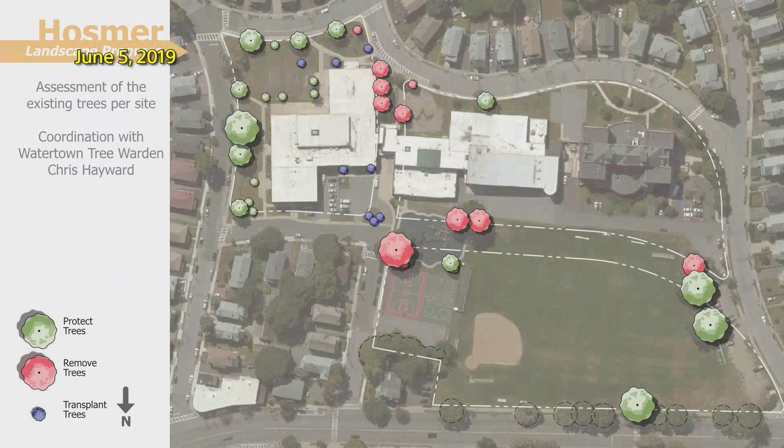And the next slide, I think, is essentially the same thing, but it just gives you a better idea of the building location and why some of the trees would have to be removed as part of the project.

These are all drawn to scale showing the true drip lines of the trees using Google mapping that's accurately geolocated to the sites. So this shows the proposed building, and again the trees to be removed in red, and it's obvious why they're either falling in the proposed building location or roadway location. In some instances there would be significant grading around the trees. But the trees we would look to protect would have tree protection fencing, chain link, very stringent specifications as far as protection, and it would be at the drip line of the trees.

We're going to chain link?

We'll review them by school, so if there are any questions associated specifically with the Hosmer, we're happy to address those before we go on to the other schools.

Okay, questions on the trees from Steve? You said chain link fence protection?

A 6-foot chain link construction fence around the drip line of trees to be protected, usually in a large group of trees, so we can capture a whole area. In this instance, along Chauncey, there's a large swath of trees right in a row. We would want to have the chain link fence running along the drip line along the entire area, so all of the lawn area would be protected.

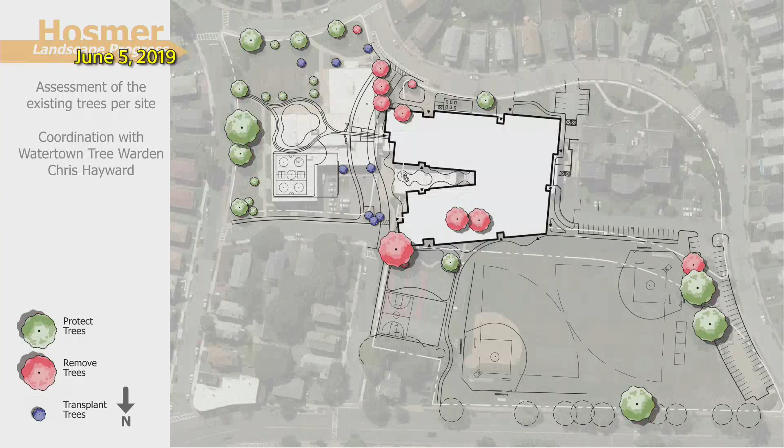Just a quick comment—those trees to the far right, the one shown in red, is in tough shape. I understand the other two trees are probably healthy, but in terms of functionality it's not going to work with the field there, so I don't know how you're going to handle it, trim them back or so on. The tree warden is well aware, and he's done some tree trimming the last time we were out there. That last tree shown in red, he does agree it's in rough shape.

Okay, thank you. Okay, Scott.

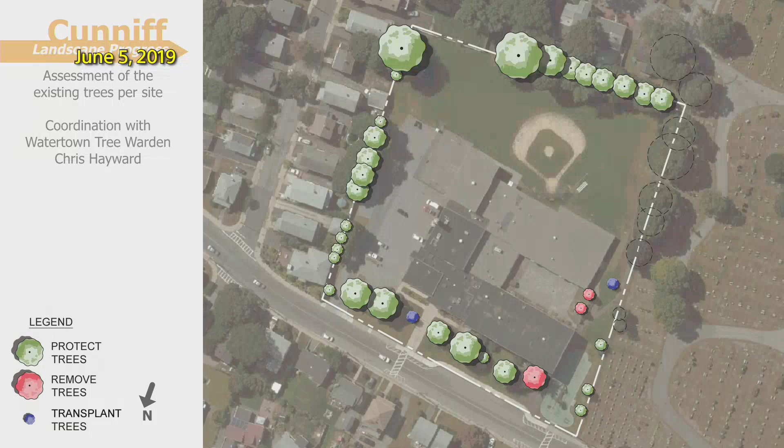This is Cunniff, and it's a little easier of a site. Most of the trees are around the perimeter. Along the front, along Warren Street, we're investigating how we're transitioning the new entrance from Warren up to the new front entrance of the school, and trying to preserve those trees along the front as much as possible, with the exception of the one shown in red, a pine tree very close to the construction of the new building, and a few transplants we're working through with the tree warden.

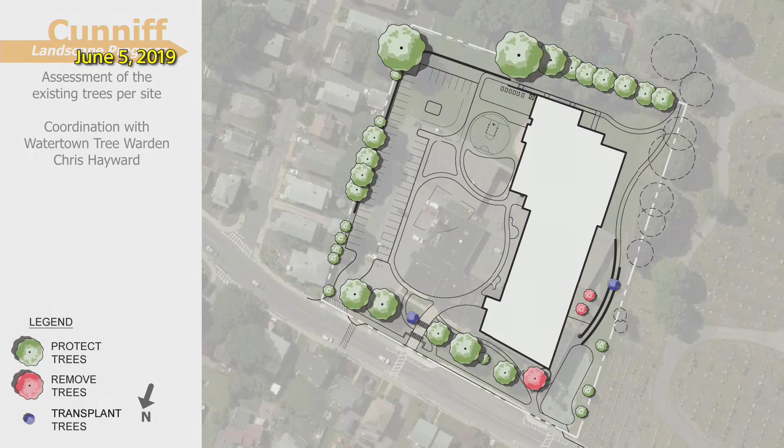Relatively light impact there. Any questions on the Cunniff? Anyone from the audience on the trees at the Cunniff?

Continuing on to the Lowell. Lowell is similar in that construction of the new wing impacts that corner of the site, which includes the trees shown in red. There are no plans for a transplant. The only extra note I'd add is that the three trees along the historic front of Lowell are going to be assessed in greater detail by the tree warden to determine their health. One thing we don't want to do is go through all these protection measures with heavy construction happening around these trees, only to find out later they were in poor condition to start with. So he's doing a full assessment, and we'll get his results back to the design team so we can make a full determination on those.

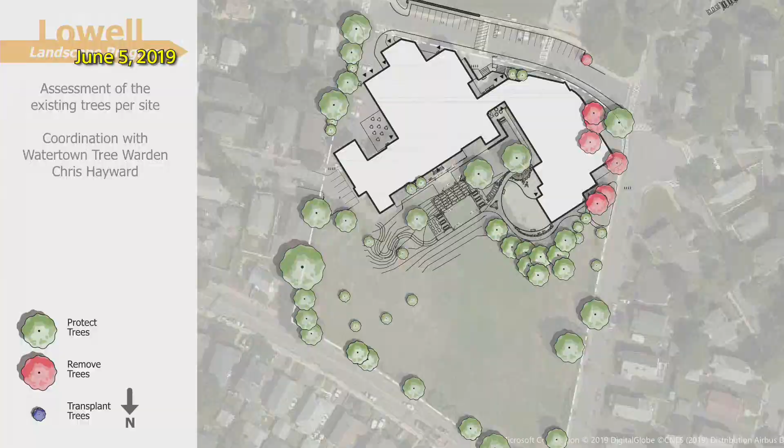Any questions specific to Lowell? It's fairly straightforward also, in that as a result of doing the primary addition in that location, it's just impacting the trees there.

It's good to see that—I know we don't like to see trees removed, but we're not removing that many trees, so I appreciate that, and I'm sure many people will appreciate that. I'd point out that with all three of the renovation addition schemes, including the one at Lowell that involved more addition, the impacts would have been significantly more. So we're pleased as well. Thank you.

I think that's it. Okay, I think.

We're in the process of getting more detailed topographical information, and particularly utility information, on all three of the sites. The surveyors are literally working on that and compiling it for us, and we hope to have it in just a few weeks. But one of the things happening during design development is all of the drawings previously shown in schematic design, which were a little more loose and conceptual, now get very real, in that we have to very definitively define the building parameters, every sidewalk, every elevation change on the site.

One of the things we're doing now as part of the site engineering at the Hosmer is we've got a building that we clearly want to keep all at one level. It's very awkward to make a transition inside a building. It feels like a renovation addition if you have ramping, stairs, and complex elevation transitions. So we've always known we want to keep the Hosmer, the new Hosmer building, at the same elevation.

But that means we've got to find a balance between the elevation on this side of the site, where we've got the roadway coming through and the primary building entries, and the elevation on the other side. You can see there is a difference. The elevation grade along this side of the site is approximately 73 to 69, and where we've got the K-5 entry and the preschool, pre-K, early childhood learning center entry, we're down in the 65 to 68 range.

Coming all the way out to Concord Road, when we set the elevation, the primary portion of the building will drive where we set the height of that first floor, driven by making sure the primary entry points on this side of the building are at the appropriate elevation to transition from the drive to a curb to plaza areas and come inside the building. Once we know exactly what that elevation is, we can determine how much we have to change the grade or elevations in the service area.

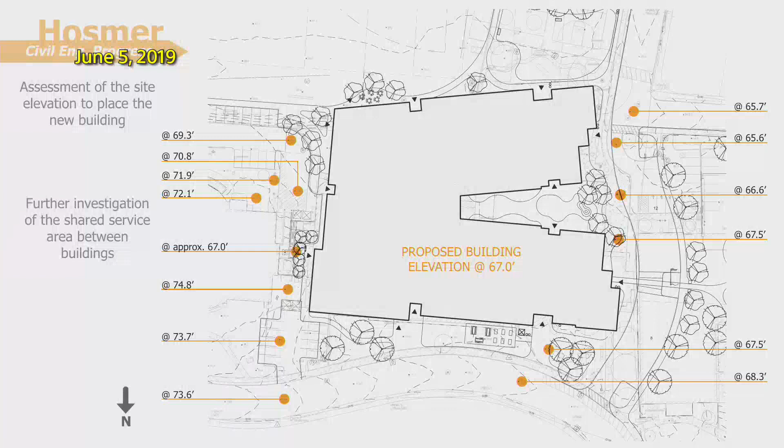It appears to us now, getting more detailed grading information, that the most beneficial approach would be if we don't necessarily just accept all the construction and design done when the two buildings were separated, because it was very much ad hoc in that it appears they just did the simplest, least expensive thing. So this construction project of the new school is certainly an opportunity to try to make everything right back here.

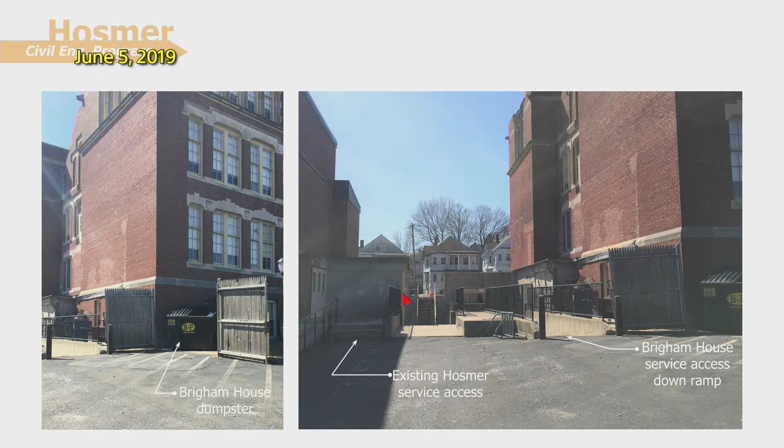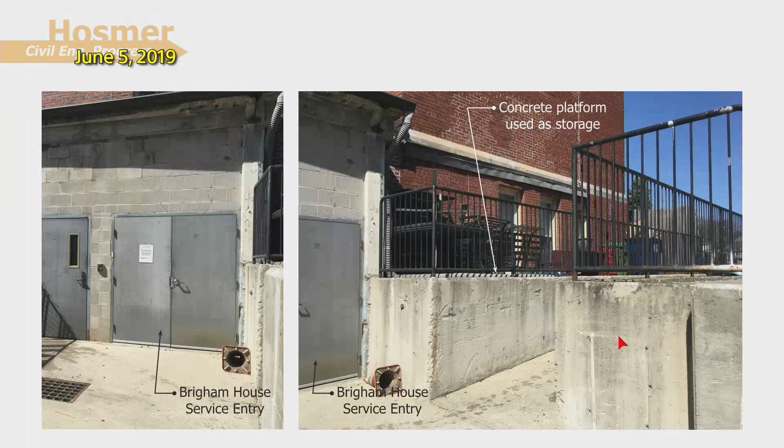As an example, they've got some elevation up high with railings, some elevation down low, retaining walls, and slopes down to their service area. This happens to be the service area at the Brigham House, and it really constricts the area a lot. You can see it best in this photo where we've got stairs coming down to a lower level, then a curb up, and then the service access and the ramp going up.

In trying to create an ideal service area for both the school and the Brigham House, it's obvious to us that a redesign and utilization of this entire area is appropriate. We're going to have to explore what's possible, because there's a lease line here where the Brigham House leases some property from the town. The town owns all this property, but the Brigham House has a lease, and we'll explore that through the building committee chair to find appropriate contacts within the town. We want you to know we're taking a more global look at trying to do the right thing in this entire area.

We'll have some proposed layouts. We were fairly close, but decided not to get into them tonight because we'd like to do a bit more evaluation. We're looking at various options for this area that get a lot more detailed than the prior conceptual options we were showing, and we'll continue to investigate that.

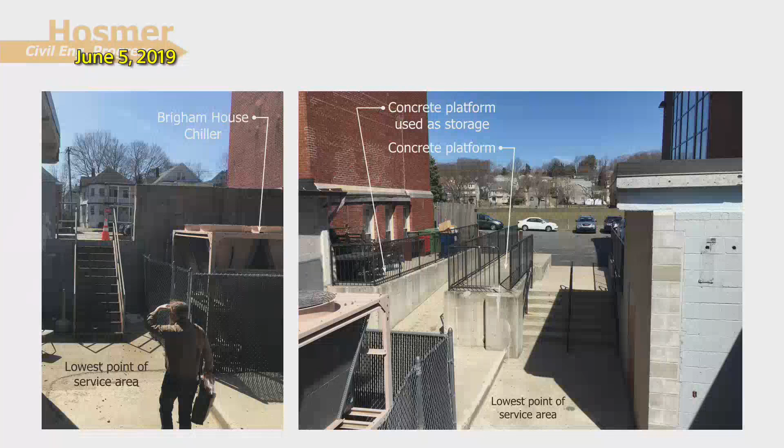If I may, I think this is a good approach at this point, and I think Steve and his office could help with the details with the Brigham House. This is the time to do it. We're there, why would we do half the job? As you said, we do own the property, we do have a lease, but we still have some potential things we can do. Thank you, and I think Steve would be the appropriate contact for that. Thanks, perfect. Steve. Perfect.

The other thing that we'll be coordinating with both the owner's project manager and Lori on, and have already begun some communication with Lori on, is that this summer is going to be the ideal opportunity to complete the additional geotechnical investigations that need to occur on the site.

This is the Hosmer site, and this is approximately the area the building takes up. What we're showing on this drawing is the Phase 1 borings we conducted some time ago to get a sense of the subsurface conditions there, shown in black. B4, B9, B6, B8, B7—any numbers in black represent a location where a boring has already been taken. You might ask why a boring was done way out here: at the time the Phase 1 work was done, there was a possibility we'd be constructing an addition in this area, so we were exploring a variety of different areas with that first phase of borings.

This summer we'll be extending that exploration to include additional borings. The red locations represent the borings that will be done this summer, and you can see they more accurately define the perimeter of the proposed new building, so we can make certain we've got data in those locations as well. So if you see activities at the site this summer, you'll know what they're up to—there'll be a drilling rig on site for a few days. We'll coordinate to make sure those activities are safe and cause as little impact as possible, but just want to make you aware that's what's going on.

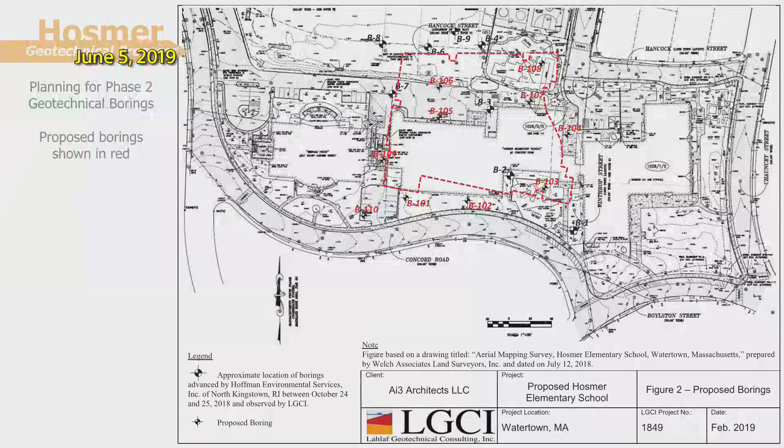I want to point out that while we're on the first floor, that same condition will exist at the dining area. This is also a public after-hours entry with a vestibule. If someone comes in from the north side of the school into this lobby area, considering this hallway and this hallway part of that lobby area, they can go into the dining area, but they can't get any further in this direction. They can go into the gymnasium, assuming these doors are open, but if you wanted them to only get into the dining area, they would not be able to get into the gymnasium. This allows you to secure this vestibule, keep these doors open, and allow anybody to go from this vestibule into the dining area or gymnasium, but not get into the remainder of the school.

Any questions? John asked a quick one back on the gymnasium: so there is no changing room for students or anybody else? Is that typical for an elementary school? You usually don't include one? It's typical at an elementary school that you wouldn't have that kind of space.

Are we designing the doors and hardware for intrusion, active shooter type thinking, where there's going to be a panic button and we lock down floor by floor? When we get to a discussion of classroom hardware specifically, we'll talk about the lockdown mechanisms and strategy, and at that point we'll want to either establish the individuals on the town side to talk with regard to that, or establish a subcommittee of this building committee. We wouldn't probably talk too much about that in open public session for the building committee, since in many instances we want to keep relatively secret the strategies we're utilizing for student safety, but we definitely would be doing that and designing for that going forward.

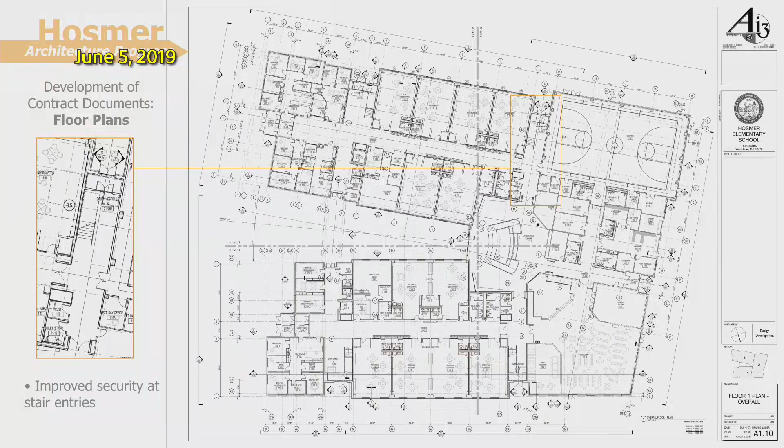One of the goals of the design development set is to allow an incredibly accurate cost estimate to be produced, so we want to make sure we're very accurate with every aspect of the building.

Scott, can you hang on for one second? John had a question. Yeah, back on the floor plans, I'm sorry, just real quick for a second.

Just basically in any two classrooms, could you describe what the wall is - is it solid between them, or is there a door between some of them? And then there's also this dotted line square on each of them - what is that?

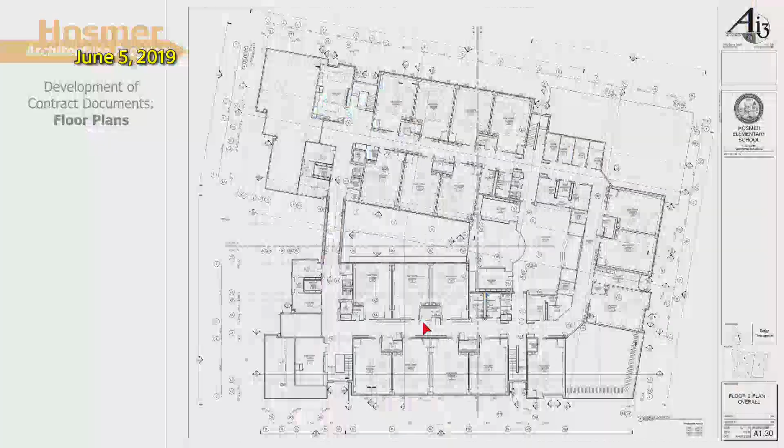The instructional program includes a lot of instructional support to students being pulled out of the classroom, but they want to keep them as close to the classroom as possible. Those rooms are also being utilized a lot for students who may not even be associated with that classroom - a lot of times there's a need to pull out a student. So the staff thus far has been very much in support of some transparency into the classroom, like a window here with the ability to obscure or shade it, but the entrance would be from this side. We've talked about possibly doing entrance from here, here, and here, but explained there would certainly be some acoustic compromise and loss of wall space. So that's an ongoing discussion, and this is the current status based on our programming discussions.

Yeah, okay, thank you.

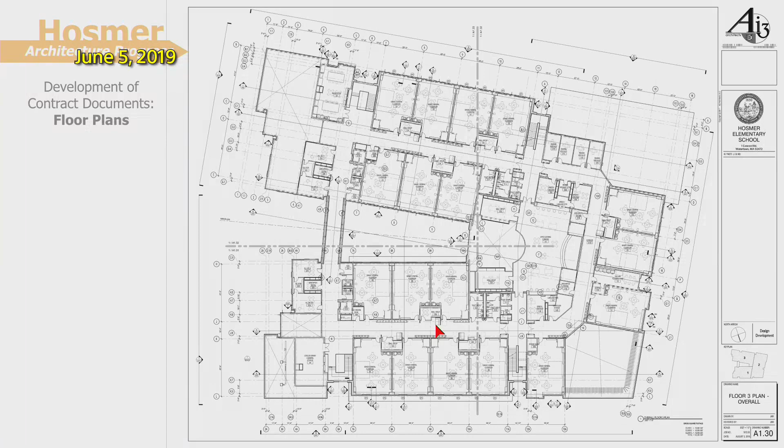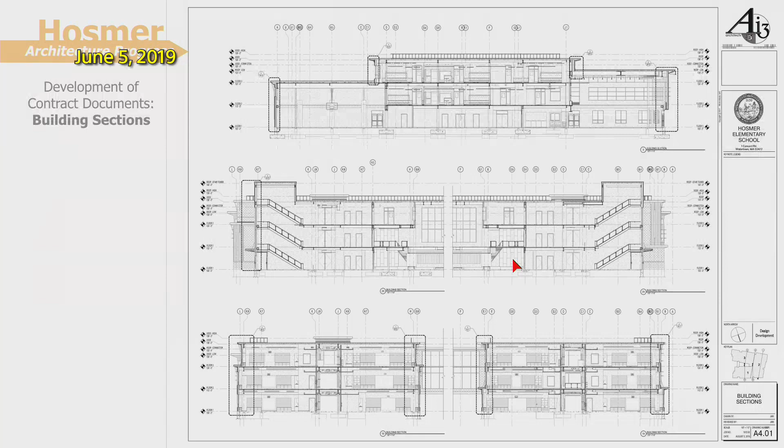More exterior elevations. The design development set will have building sections, so you're seeing literal slices through the building that start to show the structure and all of the interior finishes in sufficient detail that the cost estimator will know exactly what's being proposed.

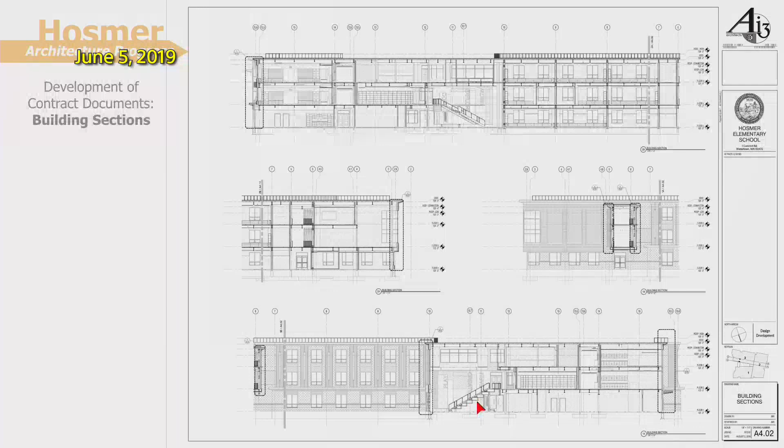This happens to be the theater-style seating in that learning commons area coming up from the first floor. Here we're out in the outdoor learning area looking at an exterior wall surface, and there we've cut through into the inside of the building.

This is a little confusing because these are the beginnings of our wall section sheets, turned 90 degrees to your view so we can show the entire wall section - this is a vertical exterior wall section cut through the building. In the final design development set, these will all be noted with materials, dimensions, etc., so the cost estimators have a good sense of that.

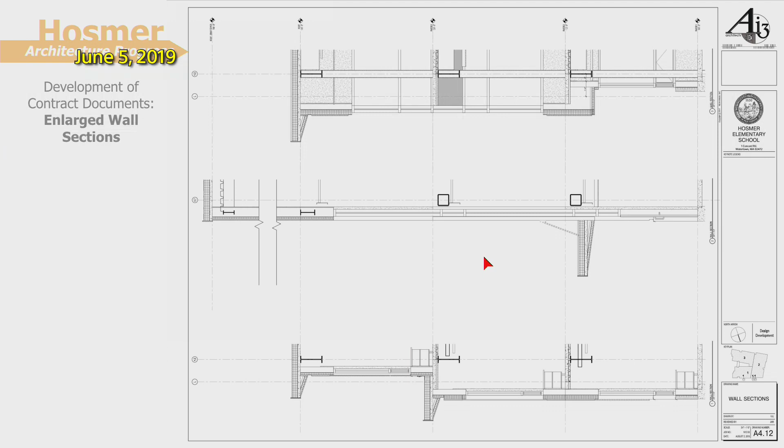We'll have all of the exterior windows, both in the form of storefront, which is a large section of window, or curtain wall, an even larger section of window, and smaller windows, clearly delineated so the cost estimators can get a sense of that. We'll have schedules in our set.

Can I ask a question? Yes. Sorry, you're flying through this, so I just have a really quick question. All right, can we back up to the exterior elevations?

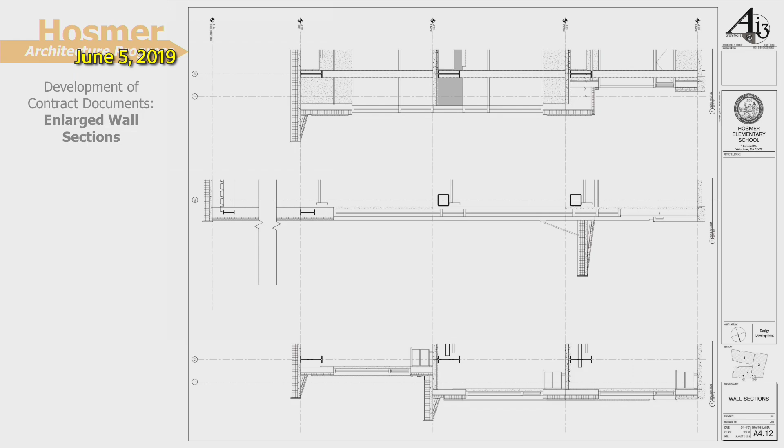Can you just briefly talk about materiality, where you stand right now? Because obviously we're entering DD, so there must be a general idea of where you're at. We are.

We are, and it wasn't my intention to skip over that. We did talk about that a lot when we presented the exterior renderings, but certainly happy to go through that. The primary exterior building material, there are three primary exterior building materials if you exclude glass and glazing. There's a natural stone material that will likely be a thin set stone, but we're utilizing it on the base in some areas. So when you see that 3 feet plus or minus height at the base in a lot of these areas, that's that natural stone material.

And then we're utilizing a metal shingle, a metallic natural metal shingle in a number of locations. So anywhere you see the cross hatching, like right here, right in here, over the top here, that's the metal shingle finish that you would have seen in the renderings that we presented. And then anytime you see the very narrow horizontal linear lines, that's the composite material that looks like wood, like horizontal tongue and groove wood that appeared in the renderings. So you see that here. You see some of it here around the metal shingle areas, and then you see it here.

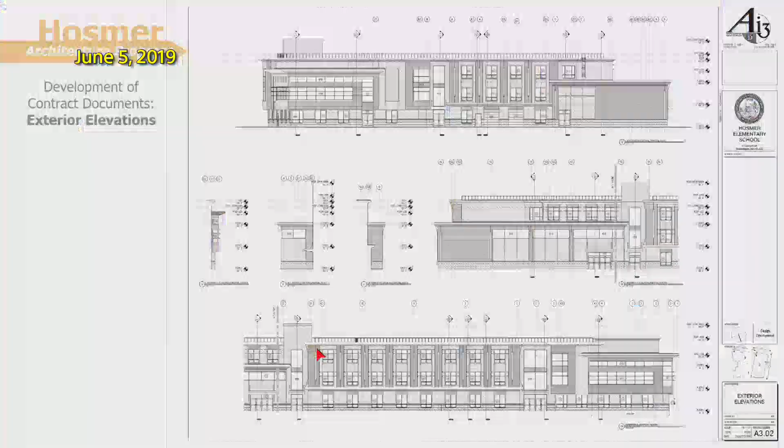See. And then on elevation 1A, the vertical components, is that structure holding up a canopy? It is. At the very top of that, it's a brace that we've introduced for that roof projection. We haven't confirmed with the structural engineer if we're literally going to make that truly structural or if it's going to be more aesthetic, but that's correct. That's what it is. And so that's kind of an exterior strut.

If you guys don't mind, please raise your hand so we're not all talking at once, thank you. Leo, so that's an exterior strut look? It is from this point up to that roof edge, Leo. And this represents a recess in that exterior surface, and then the same thing, the same strut projected out to this projected canopy down low.

Continue. Scott, could you comment briefly on the general language of this facade and also the hierarchy that you're trying to achieve? Like, what spaces are more significant than others? Can you read that from the outside? And how are you treating the facade language? On that south elevation? That's an example, yeah, good, okay, example.

On that south elevation, one of the things, and because this is part of the construction drawings, you'll see it's cut off slightly. But on the south elevation, we've talked about trying to balance the massing and make it a relatively symmetrical massing where on this side, we've got the dining area, but in terms of mass, the roof line is lower than this middle section.

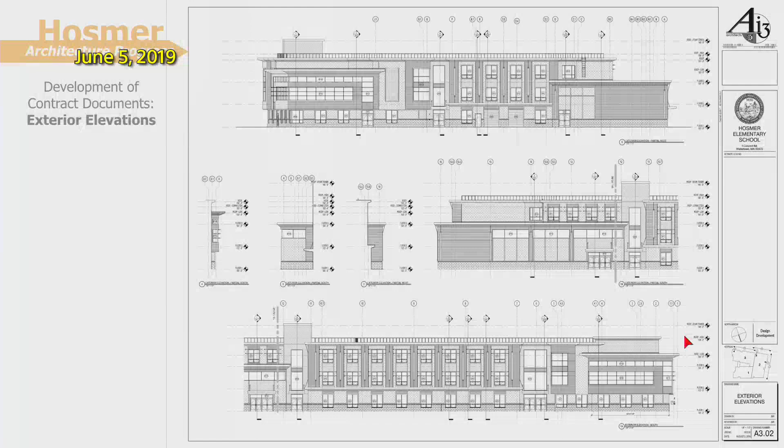So what I'd like to understand is you're purposely bringing that volume lower, but yet you're emphasizing it with this kind of edge hat. So for me, it's either one or the other. Just interested in seeing if this, especially on this northern elevation, has the same kind of condition.

It just feels like the switch between the very regimented verticality of the academic marching along in the windows, all of a sudden switching at the corners to more of like a mid-century prairie-style horizontal orientation on the windows, is a little discordant for me. But maybe that's the intent, and I just need to wrap my head around it, maybe.

I know that you have an architectural eye, so you can read these elevations much better than a non-professional. But one of the things we can certainly do is make those renderings available to you, and that might help you. I'm not suggesting it would necessarily change any of your points, but that might be very helpful in understanding some of that as well. Yeah, I think so. I guess in general, I'm just feeling like it could be simpler and thus calmer in general. Thank you.

And just one more clarification. I'm seeing the window louvers on the exterior elevations, but not on the wall section. Can you just confirm if those are still in scope? The sunshades? Yes, we're still carrying a quantity of sunshades. We don't know for certain that they'll all be required. But for example, in areas like this, where we're showing them, we are assuming that they will definitely be required.

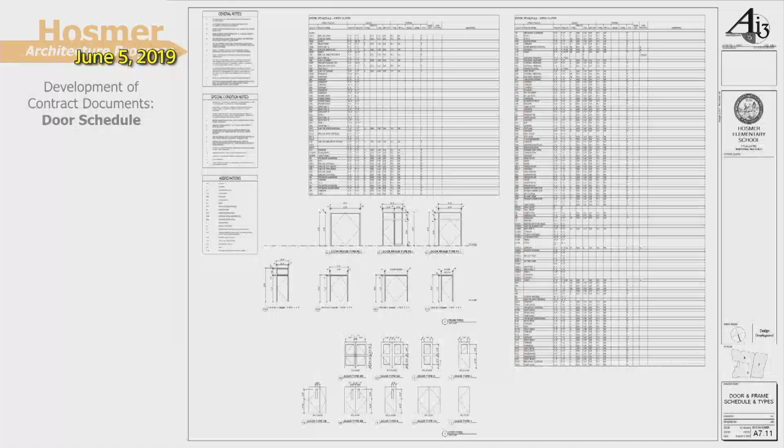And again, this is just representative. At the construction documents stage, we'll have a complete door schedule, every single door in the building, size, materials, configuration, et cetera. This is just representative of that.

Hang on one second, Scott. Maureen, did you have a question? I'm Maureen Foley from Winthrop Street.

Scott, with the metal and the composite material, how does that age? Does it fade? Does it become brown? Does the metal become brown? How does that work, and does it need treatment along the way?

The metal, we would stay away from any kind of materials that are anticipated to patina. For example, some people very much like copper or lead-coated zinc, but those change their color, material, look over time. With the proposed metal shingle that we would utilize, our expectation is that it wouldn't change its look significantly, and those are all products that have the kind of lifespan we would anticipate for a public building like this.

Although we would point out that our goal with the exterior of this building, and it's true of a lot of green, sustainable, net zero buildings, is that we would use very much a sustainable material. So when I talk about the composite wood siding, that is a LEED certified green material with some wood composite in it, that's long-term recyclable. When we talk about metal shingles, there's nothing more recyclable than that.

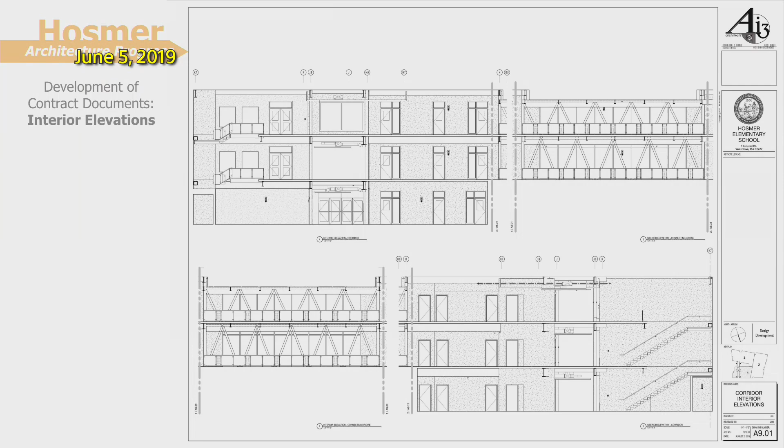These are all interior, demonstrating building interior through building sections. We are proposing, and you'll see this when we develop presentation renderings, that in some areas we'll expose some of the structure, whether that's a column, brace, beam, or girder, in an effort to give an honest understanding to the students of how a building's held up and how the structure works inside. So there will be some examples of that.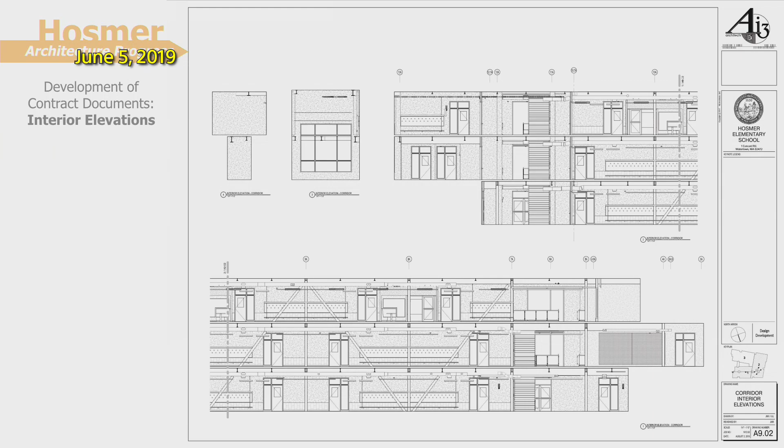We're also, with this particular building, because we're trying to do a super efficient building and reduce the exterior building envelope, going to use lower floor-to-floor heights than would traditionally be utilized. We're proposing 12-foot floor-to-floor heights to reduce exterior building envelope and overall building volume. For a number of years, going back maybe 25 years, that was fairly common. Most recently, it seems, at least in our opinion, that architects and engineers have gotten a little bit lazy, and they've increased that floor-to-floor height so they have lots of room above the ceiling for their ductwork and equipment, so they don't have to coordinate it very carefully.

But in this age of building information modeling, we've got this entire building in Revit, which is a building information model. We can look at the coordination of all those systems and coordinate them very precisely. So, in our opinion, we should be making these buildings as efficient as possible in terms of their volume, and this design in this building is headed in that direction.

Some examples of some interior elevations. Again, tonight was not intended to be a design presentation, so I'm moving fairly quickly through these, but if you have any questions at all, we certainly can stop and answer. We're showing typical interior elevations inside a classroom, and then, to John's point earlier, this is just a blown-up classroom where we'll start to show some more detail of exactly what those look like.

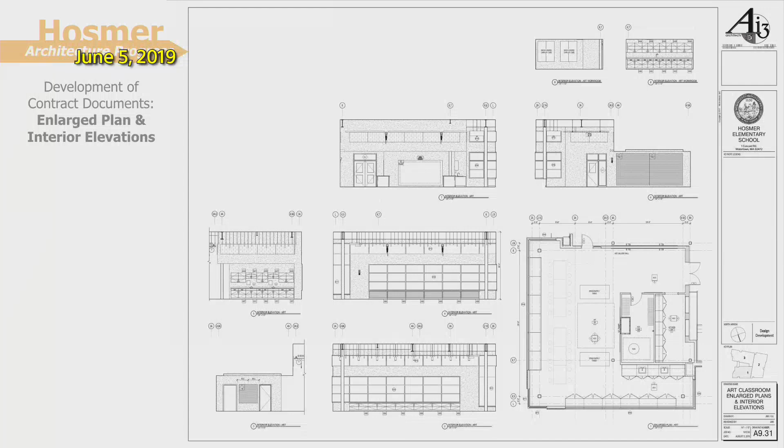Typical, this is a large plan of the art room. We're starting to blow up at an increased scale those areas and the storage in the art classrooms. Generally, our design development set will obviously be developed based on the programming we've done with the faculty, staff, and administration, but it also gives us a chance to take that documentation and go back to them for verification and additional discussions on all these spaces.

The music areas and enlarged plans of those areas and the storage needs, as well as the acoustical wall treatments. For example, the pattern that you see here is starting to introduce the necessary acoustical treatments on the walls in the music rooms.

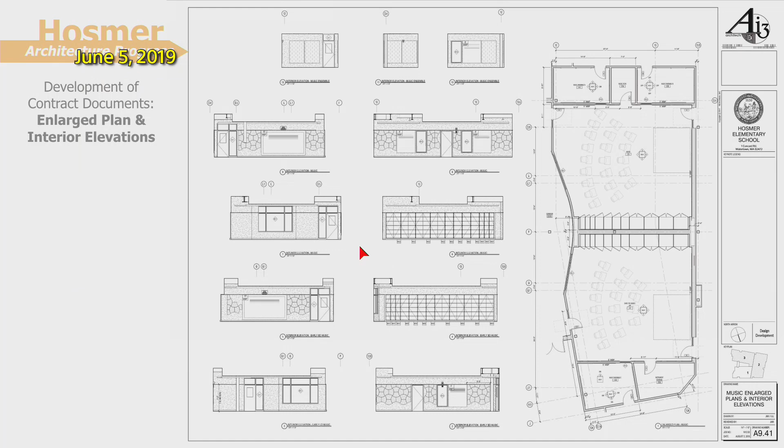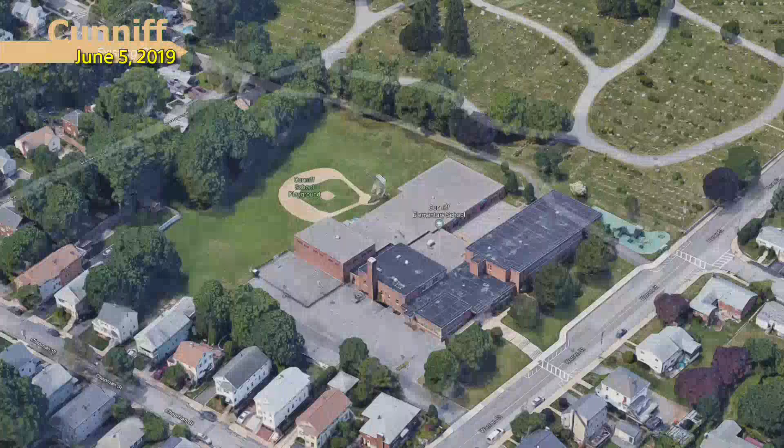More interior elevations. So we're going to show some examples of the same kind of documentation for the Cunniff. We would point out, as I mentioned on the Hosmer, that we're now starting to get into very detailed grading and elevations around the perimeter of the building.

We've mentioned this in the past, but we're studying how much of this exterior portion of the gymnasium—the gymnasium, as a reminder, is located in this area—we want to utilize this exterior wall of the gym on the lower level to be a retaining wall, because it's a much more efficient and effective method of retaining the soil in this area. We tested some scenarios with retaining walls pulled back off of the building, but the most efficient way is to make this corner of the gymnasium a retaining wall, and that's why you see the grades coming up against that.

So we're studying how to do that and keep the wide pathways, the 6-foot-plus pathways, coming down into the site and make sure we've got access behind the site and to the receiving area. We're taking a look at clearly delineated parking spaces now and the space required for that, making sure we've got handicap access off of the curbside elevation and the sidewalk elevation at the street.

So Kelly, south side, below the parking lot. Keep going, keep going, right there. That hard line's a retaining wall, right? Right, so we're basically turning our back on the whole south side of the lot. I understand there's some severe topography there, but I'm trying to understand why we wouldn't look at the potential to regrade and push that retaining wall back so we could capture some of that for hardscape, playground, some actual usable site. It's super tight, but the property line is right there, so you don't have much opportunity to make up the grade.

Okay, I see what you're saying. I didn't realize the property line was there, sorry about that. The property line's really tight on this drawing, and along with that, there's a tree line that follows that property line essentially. For example, even over here, we're doing everything we can to keep the grading the same before it comes down to the building, so we don't lose any of those trees along that edge.

As a reminder, to the chairman's point, we did an analysis subsequent to the building committee meeting where we had this moved away from the cemetery. We moved it back, and we also demonstrated with an analysis that this proposed building leaves much more open space than the current building does today, and in fact is a larger building but leaves more open space. Now, how that open space is delineated, we consider hardscape and green space the same in terms of both being open space areas, but overall it's a great improvement to open space on the site.

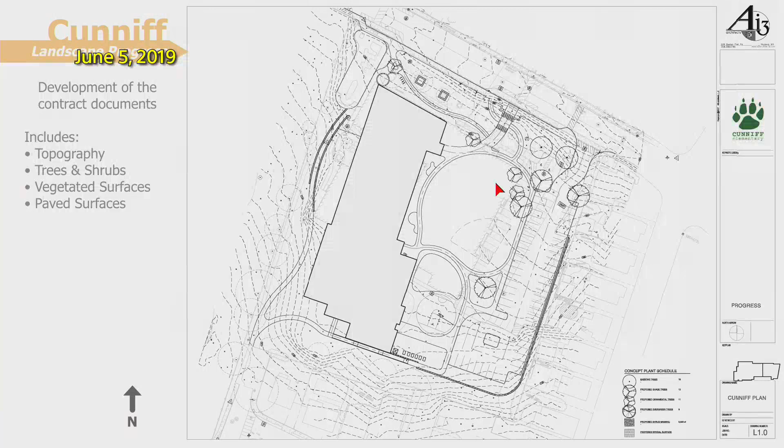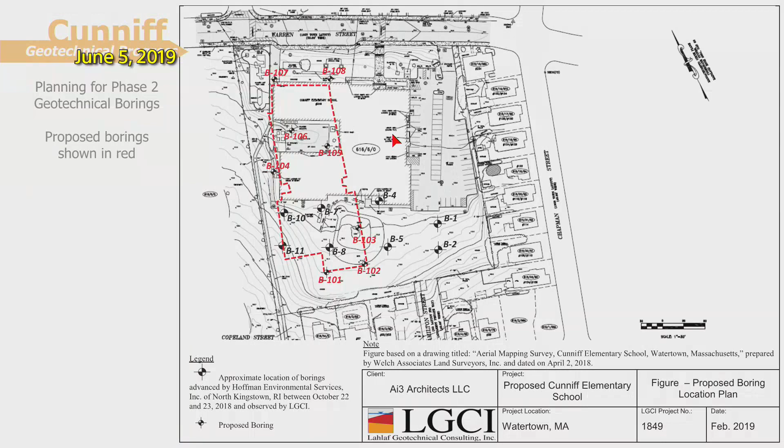These are both the prior, just like with the Hosmer, and I'll be quick with this. In black, the borings we already have as a result of the first phase of borings. In red, the borings that will be completed this summer, so that we have adequate information for the design and construction of the foundations of the new building. We'll also be gathering some test pits, but also installing some wells to determine groundwater levels, because we have to utilize this information as part of the stormwater underground infiltration system design.

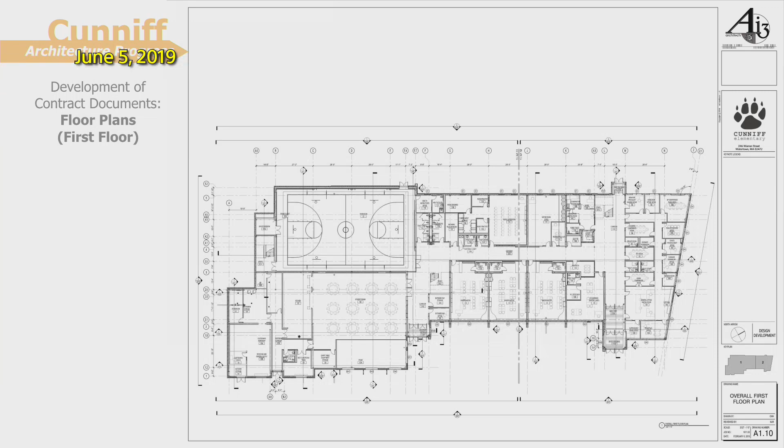The floor plans for the Cunniff. We've walked through these floor plans in detail, so I know that you know how they lay out. This is just demonstrating the kind of product you're going to see at the end of design development in an actual architectural drawing. The second floor of the Cunniff, third floor of the Cunniff. The layout hasn't changed, so I'm not going to spend any time reviewing it.

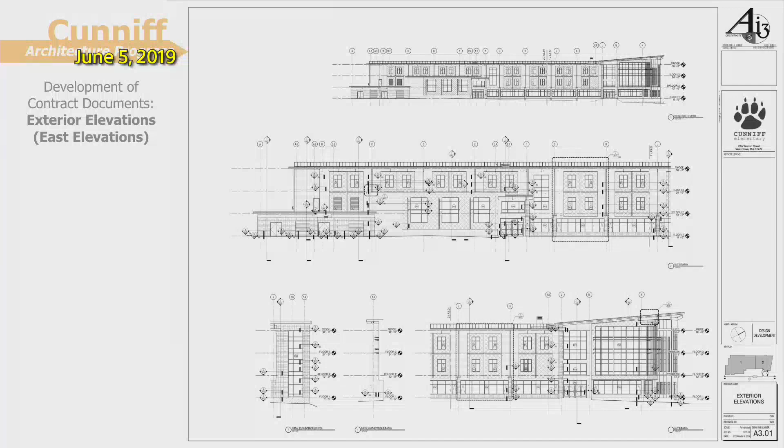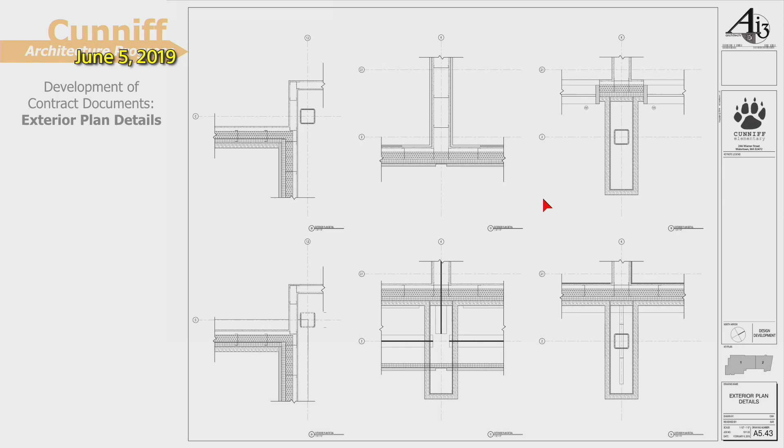Exterior elevations. Same materials palette that we proposed for the Hosmer. The renderings that we presented on the Cunniff, I think, represented those materials accurately. Those are the front and back elevations. Building sections on the Cunniff. The start of development of what we refer to as exterior plan details, which just means blowing up key areas of the building plan where we've got something architecturally or structurally going on that we want to make sure the cost estimator can capture. So these drawings will all be finished to provide that information.

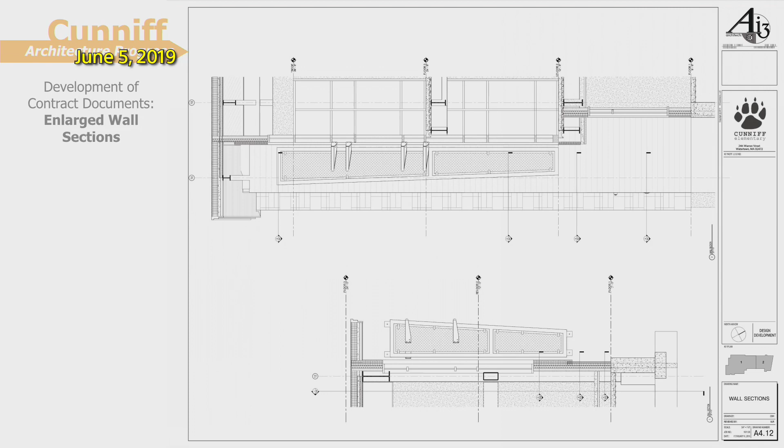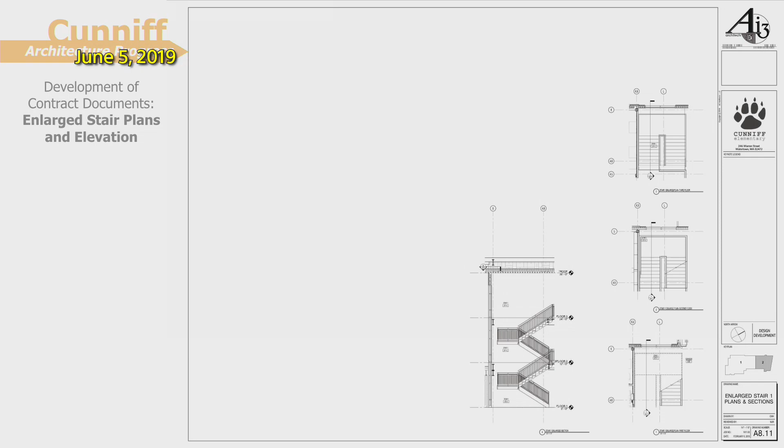Wall sections, very similar to the ones that we were showing on the Hosmer in terms of the information that they're trying to communicate. Our glass on the exterior of the building, starting to show sizes, configurations, orientation for all that, schedules like those we showed for the Hosmer, developing interior door details. We always want to make sure we delineate the stairs very clearly for the design development set, to make sure that we got the cost for all of those captured. And then you'll see, just like with the Hosmer, our interior elevations have more delineation and more detail on them, because we want to make sure that we're capturing everything that's going on. This is not intended to be a design presentation on the interior. We'd want to do that with some renderings and some color images and some three-dimensional product.

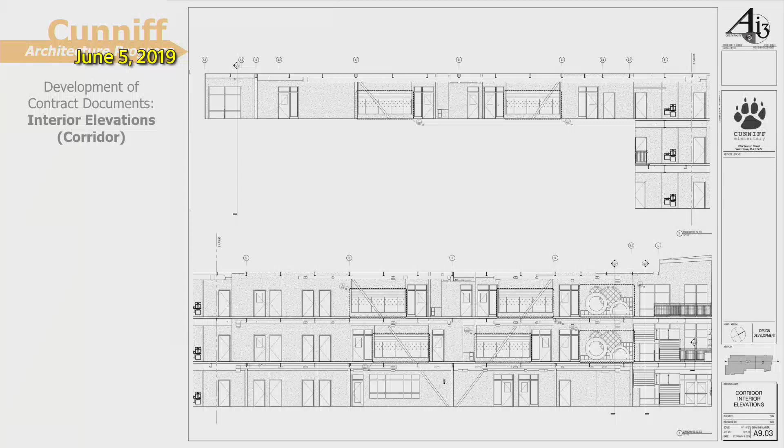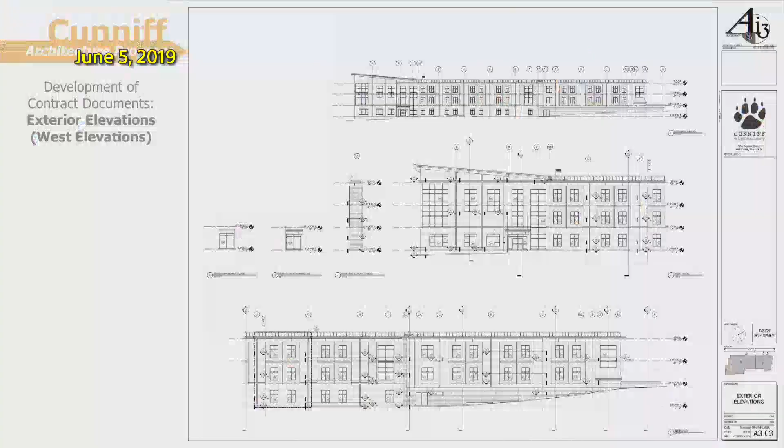John: Yeah Scott, just quick, I'm back on some of the exterior elevations, so I didn't realize this, but part of the building is only 2 floors? Or am I not reading this right? Which drawing are you referring to? It goes back a ways, the west elevation? What's on the bottom there? Where are we, is that looking like we're in the cemetery? That's where the grading is coming up on the gymnasium that I was referring to. So we're on the back side of the building, and where I indicated that we'd be using the gymnasium as a retaining wall, the gym is down at this level, but the grade around it is starting to creep up around the perimeter. Does that make sense? So we're standing in the cemetery? Yes, we are. Okay. And so the gym has no windows on this side, is that correct? Only up higher. For example, this is the upper section of the gym, because it's a two-story volume. The gym is two levels. Correct. I see. Okay, thank you.

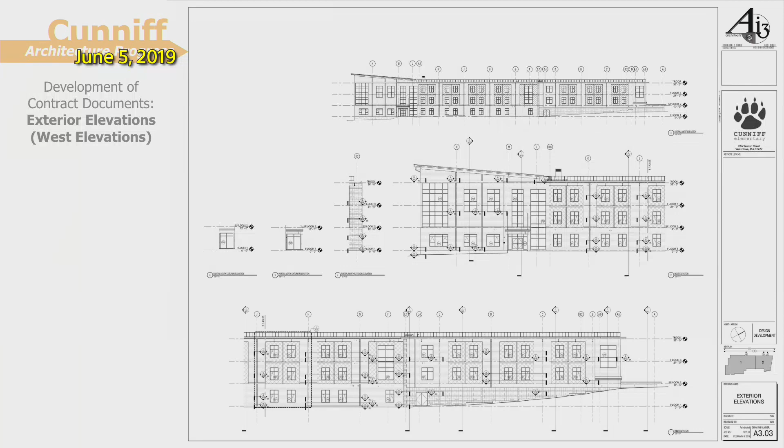Kelly? Sorry, Leo? This is a question for the chair. I just want to make sure the public is aware this is the design development phase that Scott is in currently, right? And he's talking about completing this phase within 7 weeks. Is that correct? That's what he said. That is correct, end of July, for both of these buildings. And I guess the point is that essentially you're contracted to design the building during this period. Is that correct? That is correct. Right, so I saw on the agenda that the point of this meeting was to go through these design reviews, which we're doing, right?

So I guess I want to make sure that when you cross over into the construction documents phase, which I assume is coming next, you're essentially not designing any further after 7 weeks from now, once you deliver this design development set, correct? I would say we're not redesigning, we're continuing to design more detail into certain areas, getting more specific. I don't want to put words in your mouth, but you're digging into developing what we see here on the page, right? That is correct.

I just have a general comment that I think we need to really be aware of the materials that Scott is talking about on both of these buildings, and we really need to think about it and discuss as a committee whether we want to move in this particular direction. I'll work with Scott to do a presentation, and we'll bring samples as well, as some developers do when they come to planning and zoning, and we can have a discussion. We'll have a meeting about the exterior finishes.